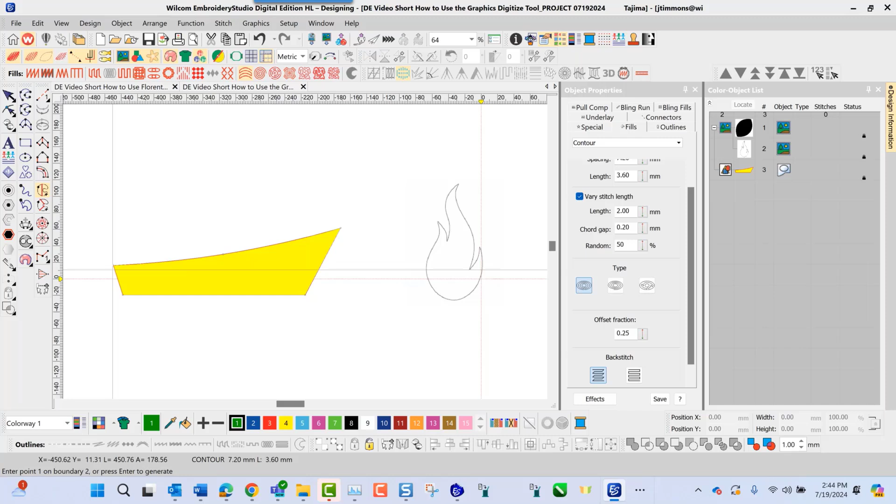Very simple. As I go in, I place my node points on the screen. As I press enter, I enter my entry point and my exit point, and there's my fill.

So what happens with this particular fill type here, this is what this looks like. With the contour effect, you also have the ability to go in and adjust the settings here. You can adjust the spacing. The spacing is now at 7.2. If I make this 5.0 and press enter, you'll see that the density closes in as I tighten that stitch density on this particular fill type.

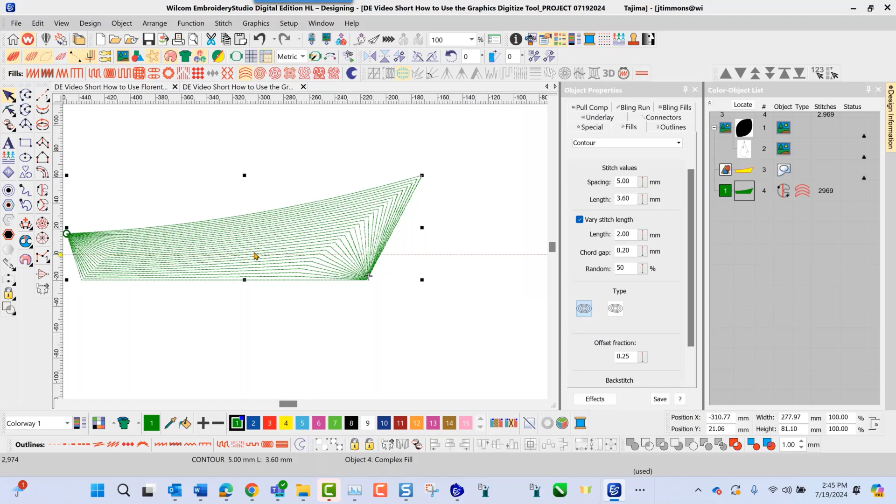I can also go in and choose my reshape mode. I can adjust and change my starting and exit points. And I could also click on my stitch angle and bring this down, and change my stitch angle. As I change the stitch angle, you can see the shape here as it adjusts based on the different stitch angles I choose for this particular object on the screen. And this is what that looks like.

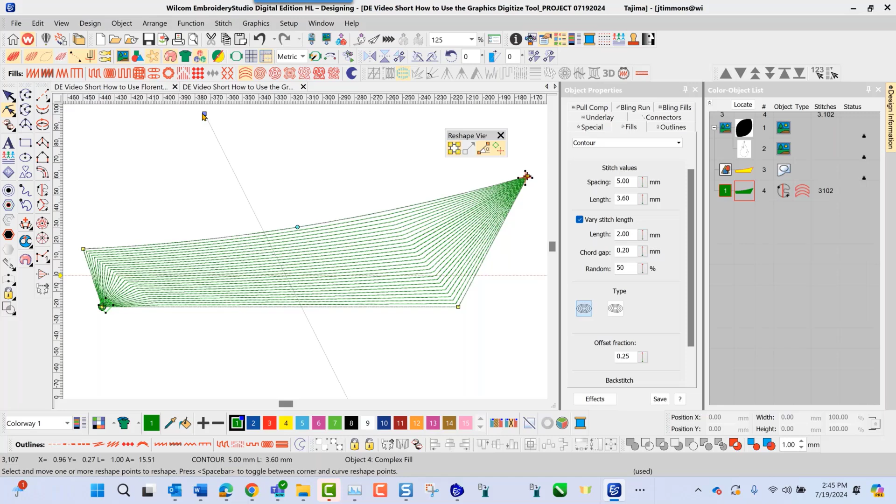With this particular tool, keep in mind that because it is a contour tool that follows the shape of the contour, the density does change with this fill type. So you do have to be careful about how wide your objects are as far as the positioning of the shape. That is your contour tool.

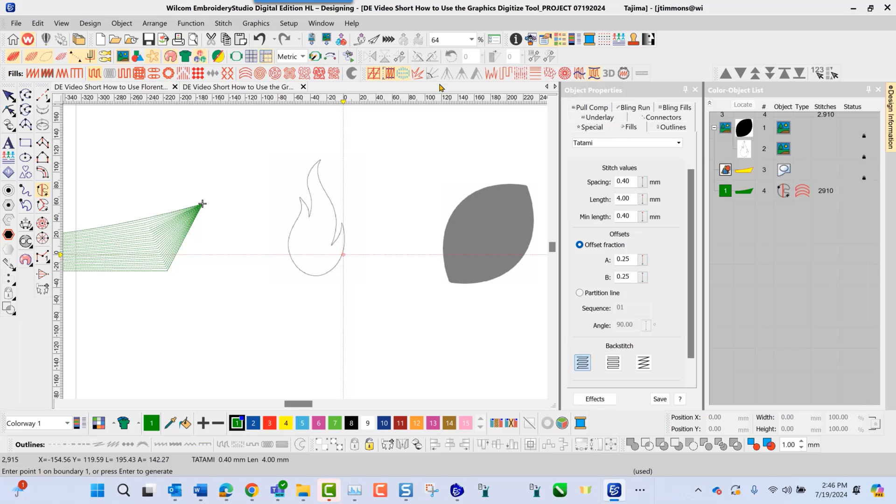Next, we're going to take a look at the Florentine effect. This particular tool allows you to go in and use a Florentine effect fill within a fill area. To activate this, I'll navigate, choose my complex fill tool, choose my tatami setting, and navigate over here and select my Florentine effect. Once I do this, now I'm able to go in and create my shape. I'll start here at the top, and as I go in and create my shape...

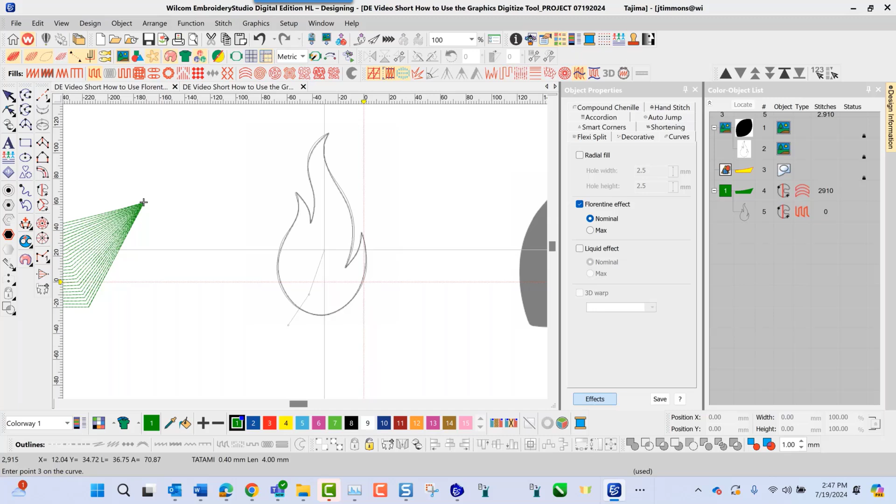This will allow me to go in, adjust and change this stitch angle on this particular fill type. So I go in, and I'll press enter to close my shape. I enter my entry point here and my exit point here. And now I'll do my stitch angle — this is a stitch angle here that you can actually curve, and that's what makes this one unique. As I press enter, now I'm going to navigate to my pick tool.

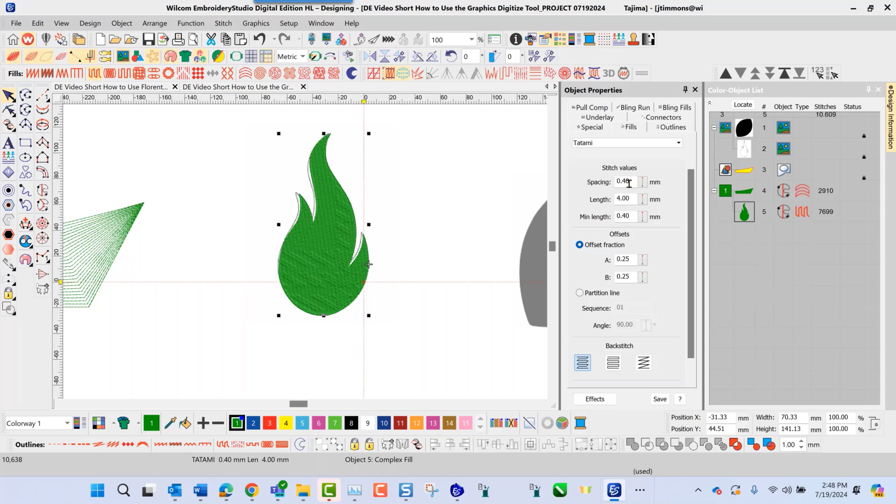And now inside my object properties, with my fill type, as I right click, object properties, here I can go to my fills. For my spacing, I could adjust this — I'll make this 3.0. With this fill type, I'm able to go in and adjust my stitch angle here. When you choose this particular fill type and open the density, you see the lines underneath my fill going through my object, as you can see this stitch on the screen.

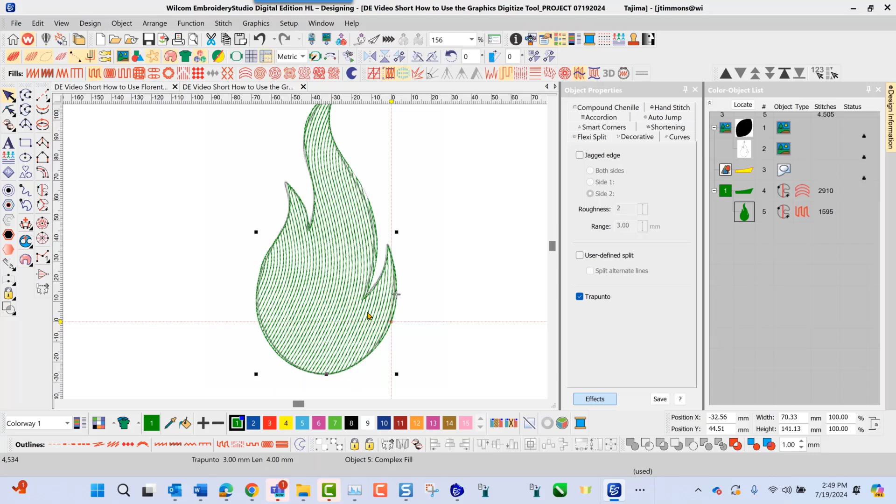What I can do here, we have a tool called trapunto, and as I select this trapunto tool, it forces all of the underlying stitches to the outside of my fill area, giving me a very nice shape that I can go in and use. And if I want to change this shape, I can click on my reshape tool and adjust the stitch angle by moving the node points to the stitch angle I want to use for this particular fill type. This is the Florentine effect inside the Wilcom EmbroideryStudio Digital Edition.

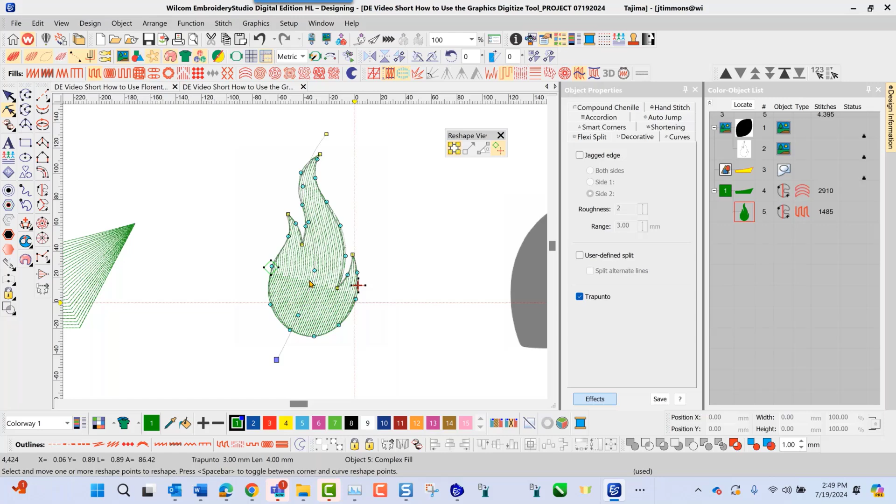The next tool we're going to take a look at is the liquid effect tool. This tool allows us to go in and use a tatami stitch fill with a tatami setting. This time we'll go in and select this icon. This icon is different than any of the other icons because this time it will allow us to do 2 stitch angles in one object.

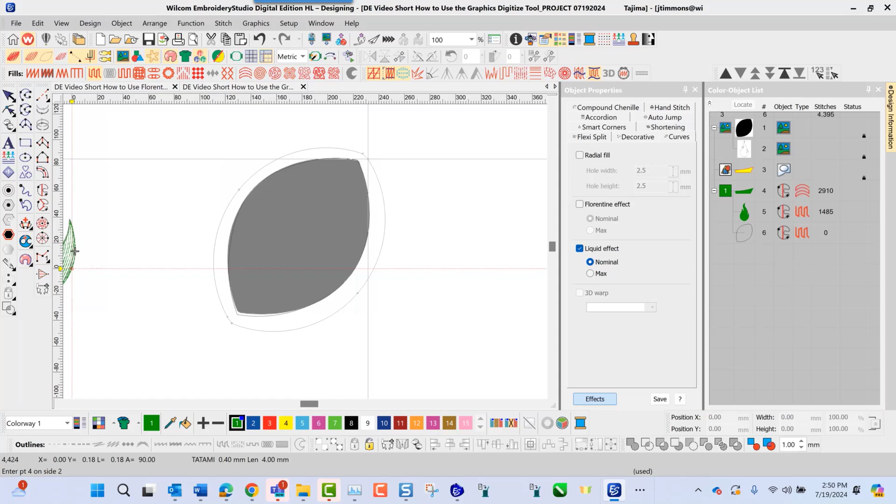As I go in and digitize the outline here of my football, once I get that outline finished, I'll press enter. I enter my entry point here and my exit point here at the end. Now at this point, I can go in and do my stitch angle for side 1 of my object. This is side 1, so I'll left click here, right click at 12 o'clock here. Once I get that side 1 completed, I'll press enter, and now that lets me do side 2, like this. Once this is completed, I'll press enter, and it fills this in.

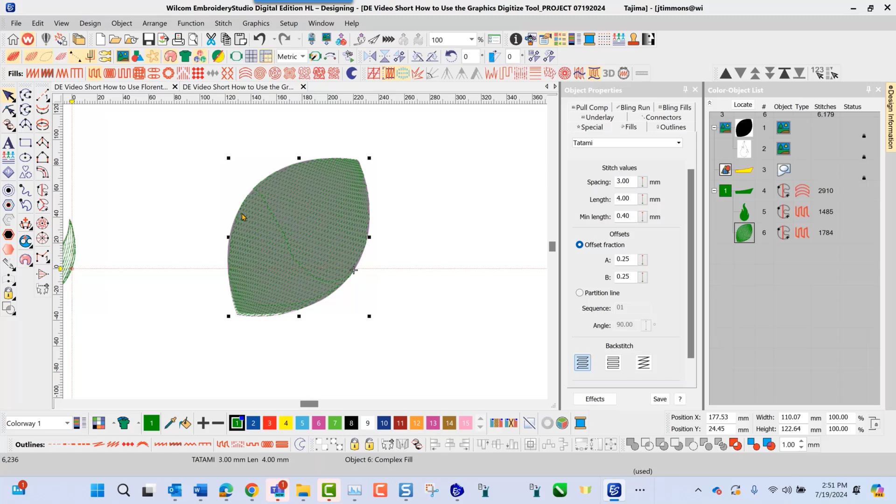To take a good look at what this looks like, again we'll select our pick tool and go in here, and we're going to open up the density for this also. Let's make this 3.0. As I press enter, I'm also going to hide the bitmap image in the background. You will see the shape here that's taken place using this. And as I click on my reshape tool, you'll see the 2 different stitch angles. This is a very complex fill type to do here.

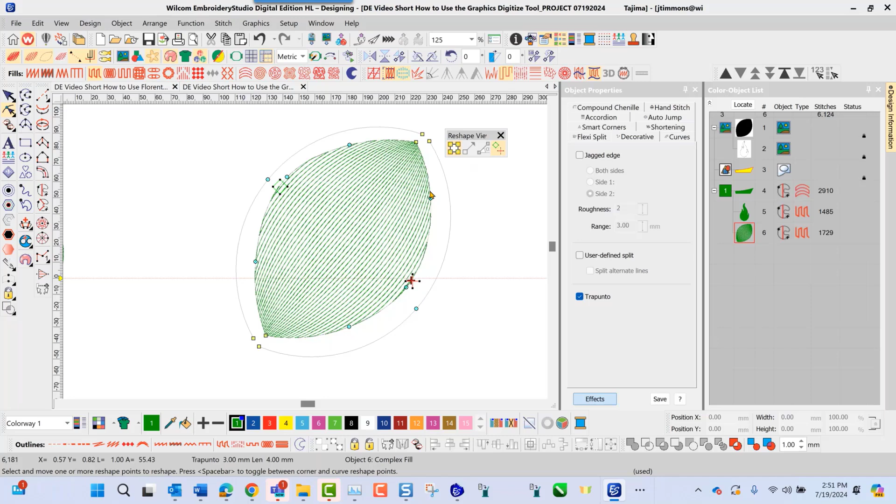The running stitches underneath this, we can move to the outside by simply navigating up top, clicking on our trapunto tool like this. These are some great stitch types and fills that you can use inside the EmbroideryStudio software to enhance your embroidery. That's going to do it for this short.